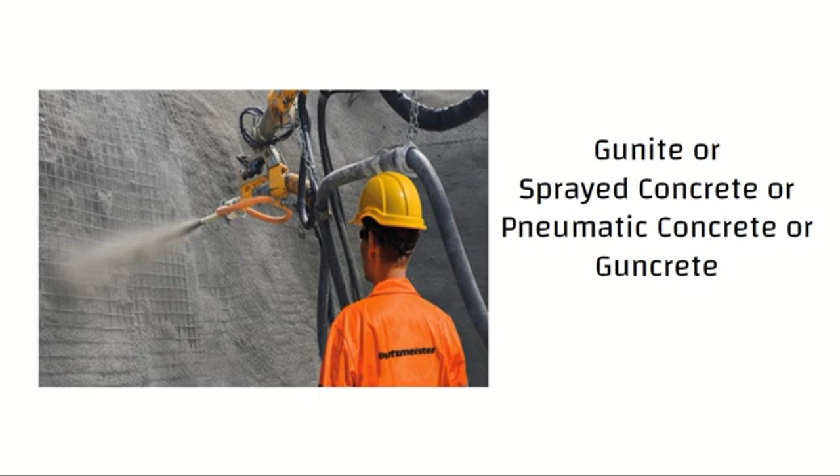Hello friends, Shotcrete, also known as gunite or sprayed concrete or pneumatic concrete or guncrete. This construction technique was first used in 1914.

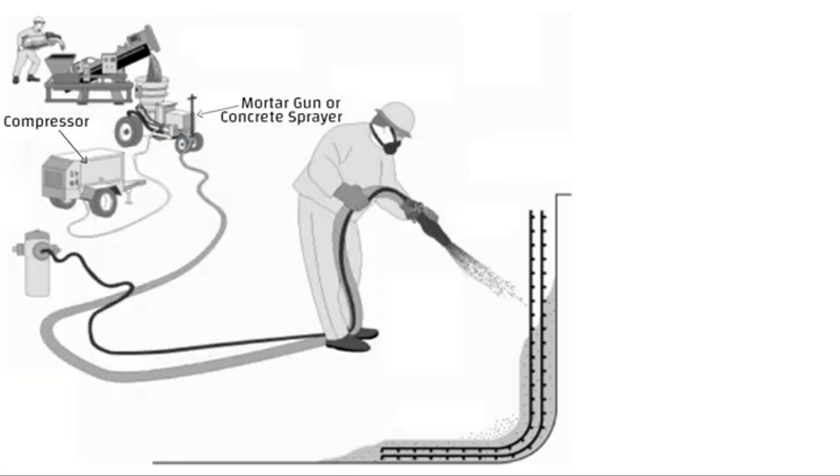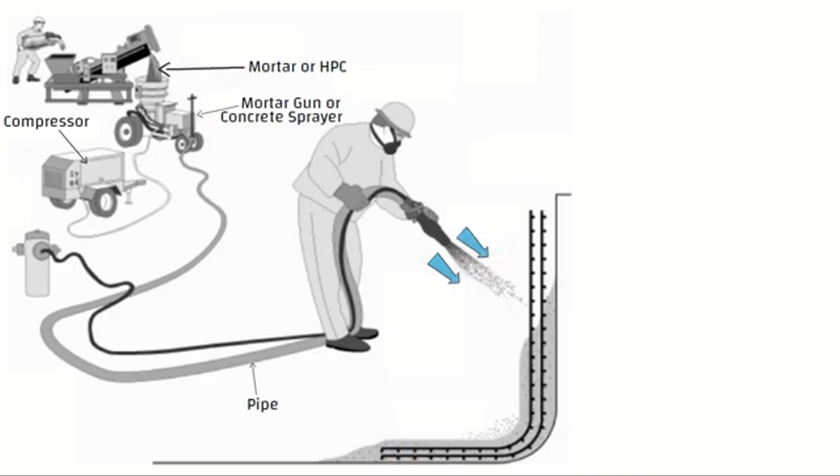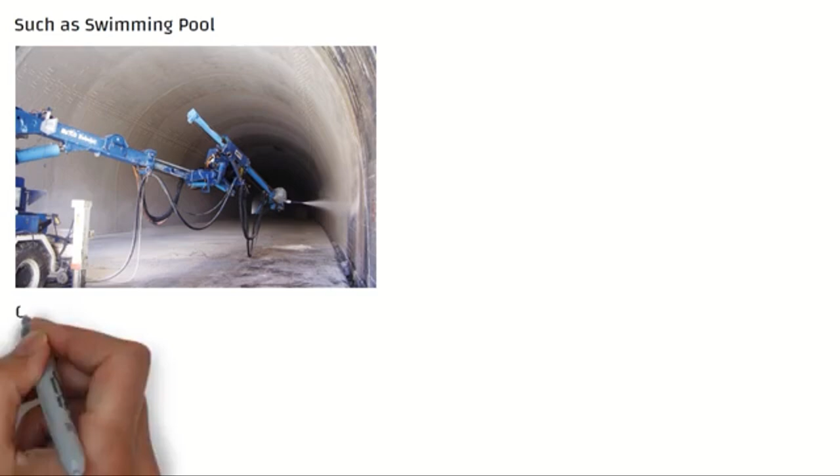Shotcreting is done with a special unit which consists of a mortar gun, also known as concrete sprayer, and a compressor. In this technique, a mortar or high performance concrete is conveyed through a pipe and pneumatically projected at high velocity onto a surface. The nozzle is controlled by hand on small jobs such as swimming pools, and on larger work it is attached to mechanical arms and operated by handheld remote control.

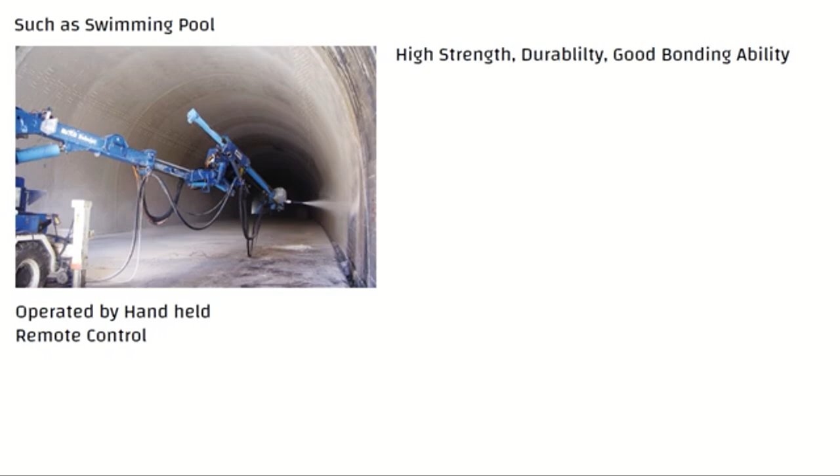It has a high strength, durability, good bonding ability, and it can be used in areas of difficult access. It can be easily sprayed onto a surface at high velocity, making it handy for operation.

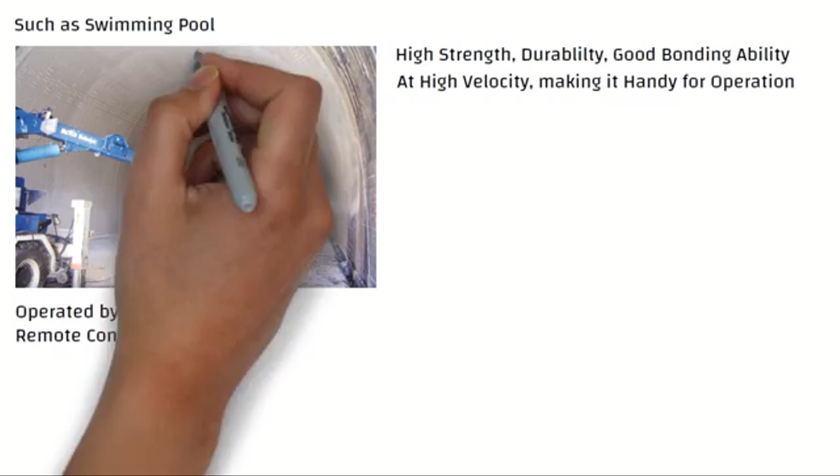Now let us understand how shotcrete is different from conventional concrete. Conventional concrete is first placed and then compacted, whereas shotcrete undergoes placement and compaction at the same time. The impact created by the application consolidates the concrete.

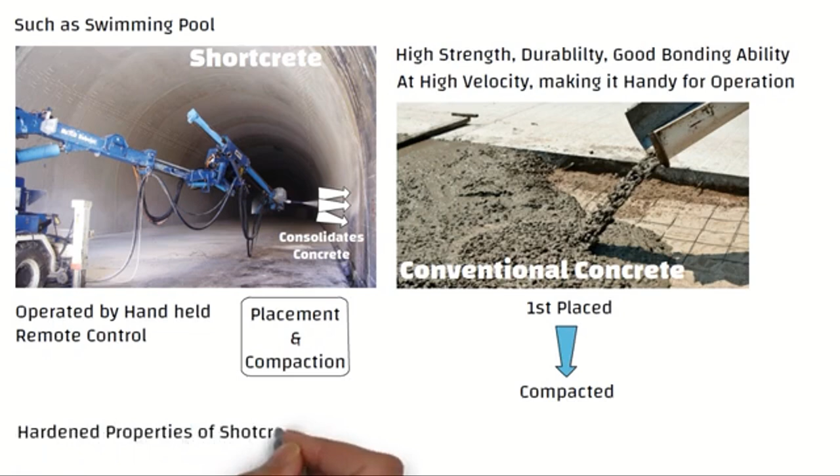Although the hardened properties of shotcrete are similar to those of conventional concrete, the nature of the placement process results in an excellent bond and instant capabilities, particularly on complex forms or shapes. The shotcrete process requires less formwork and can be more economical than conventionally placed concrete.

Poured concrete can have a compressive strength of 2500 to 3000 psi, whereas shotcrete exceeds 4000 psi. When concrete is sprayed on a surface, it causes compaction of the shotcrete paste, which results in good adhesion to the surface.

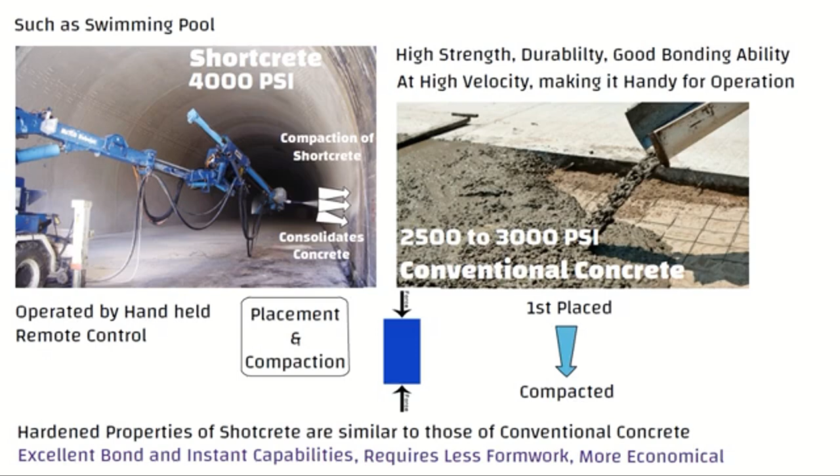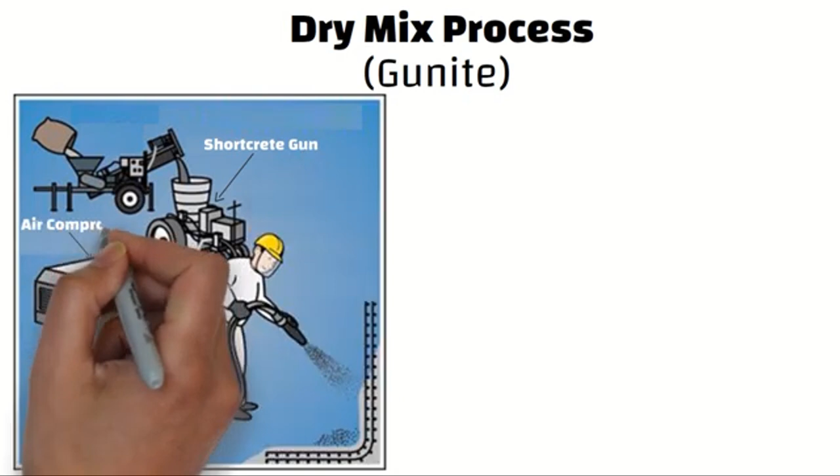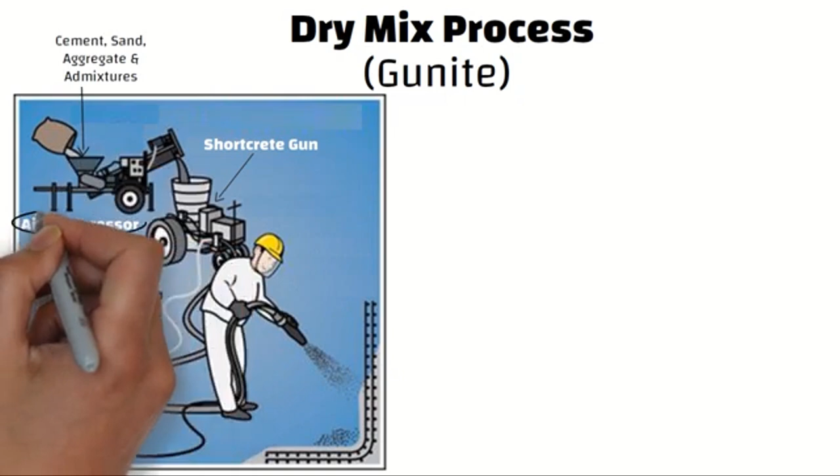Dry ingredients like cement, sand, aggregate, and admixtures are placed into a hopper and blown through a pipe using compressed air to a nozzle. The water is injected at the nozzle by a nozzleman to hydrate the mixture immediately before it is discharged onto the receiving surface.

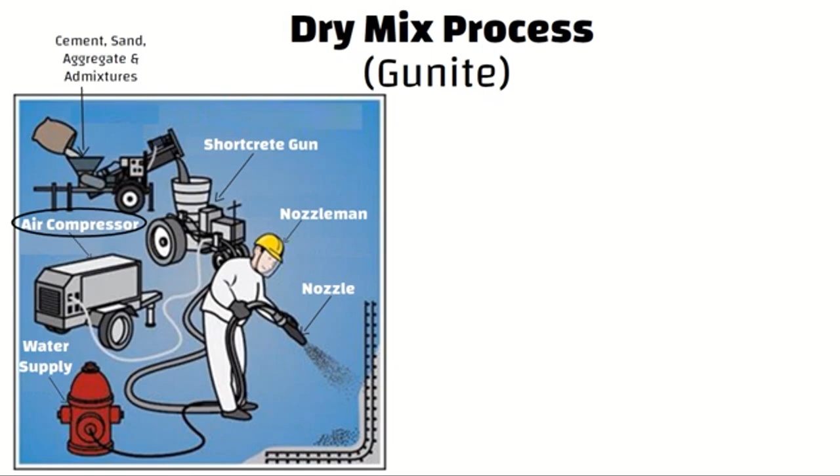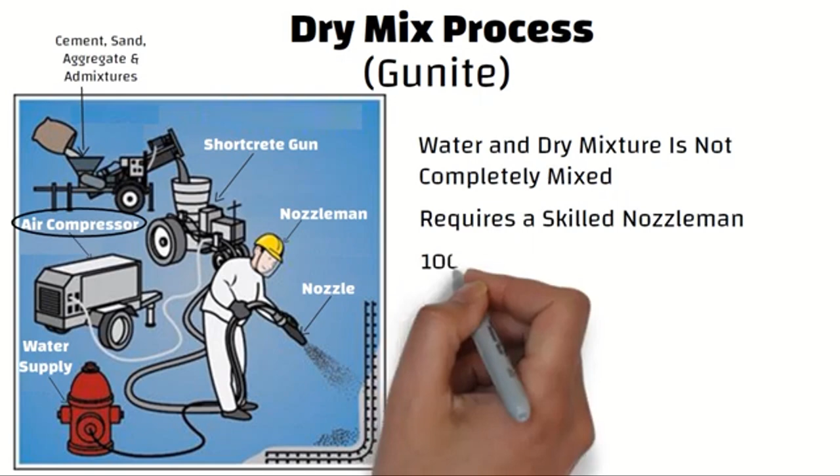The water and the dry mixture are not completely mixed, but this is completed as the mixture hits the receiving surface by high impact. This requires a skilled nozzleman, especially in case of thick or heavily reinforced sections. A nozzleman can operate from 1000 feet horizontally or 500 feet vertically from the gun.

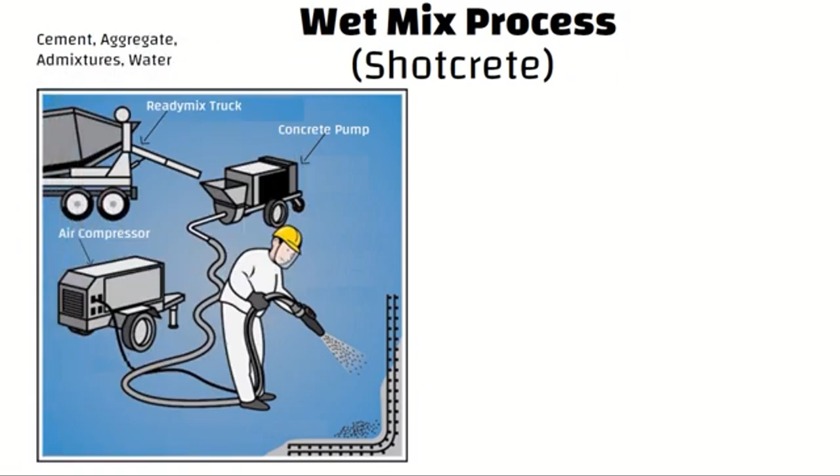Wet mix process. You can see in this picture, the ready mix truck is located here. This is the concrete pump and this is the air compressor. The cementitious material, aggregate, admixtures, including water, are thoroughly mixed by the ready mix truck and poured into a concrete pump.

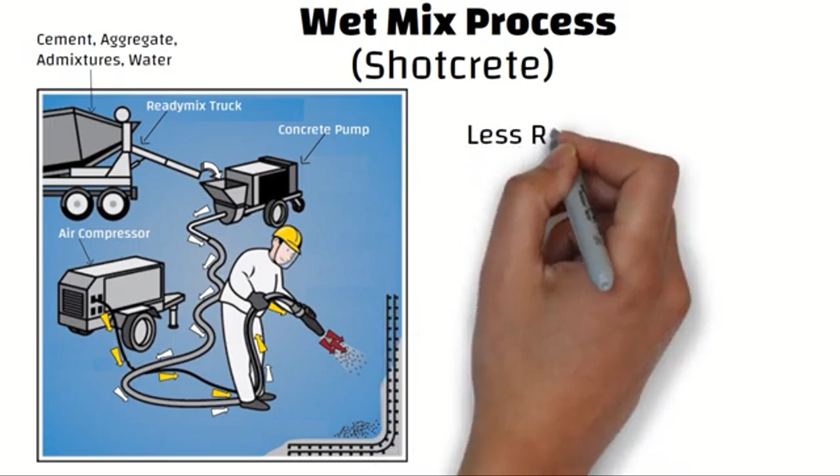Wet material is pumped to the nozzle where compressed air is introduced to increase the nozzle discharge velocity, and the mixture is thrown onto a receiving surface. The wet mix process generally produces less rebound, less waste when material falls to the floor, and less dust compared to the dry mix process.

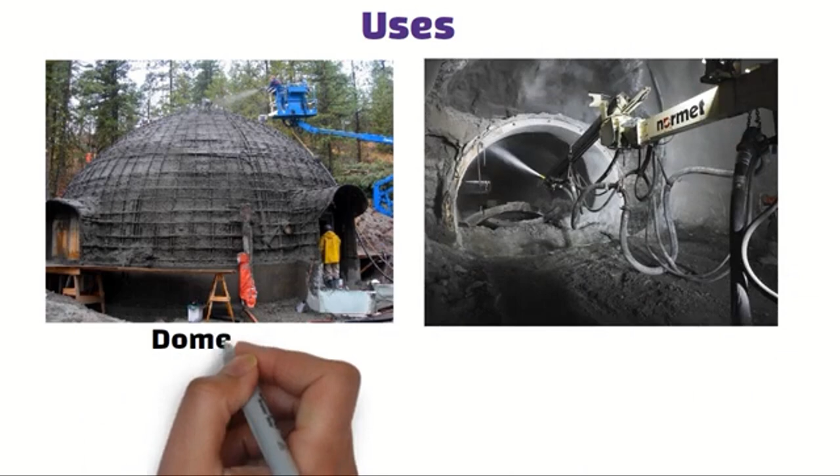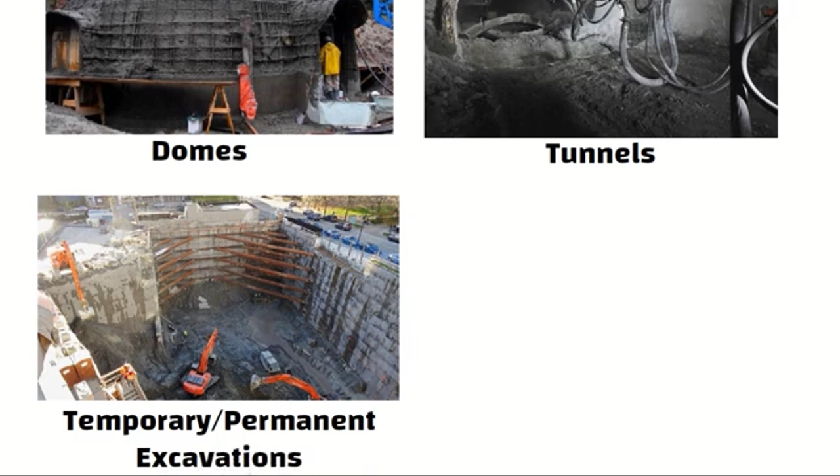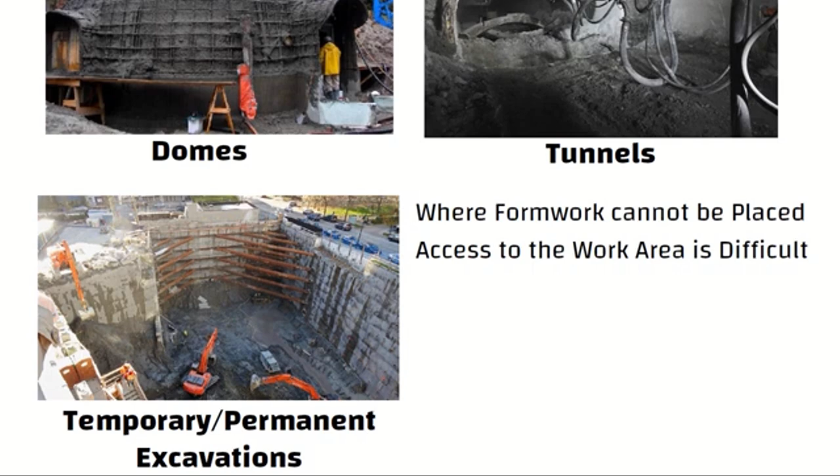Uses: Shotcreting has proved to be the best method for construction of curved surfaces like domes, tunnels, etc. Shotcrete is used to reinforce both temporary and permanent excavations. Shotcrete is advantageous in situations where formwork cannot be placed and where access to the work area is difficult, and where thin layers or variable thickness are required or normal casting techniques cannot be employed.

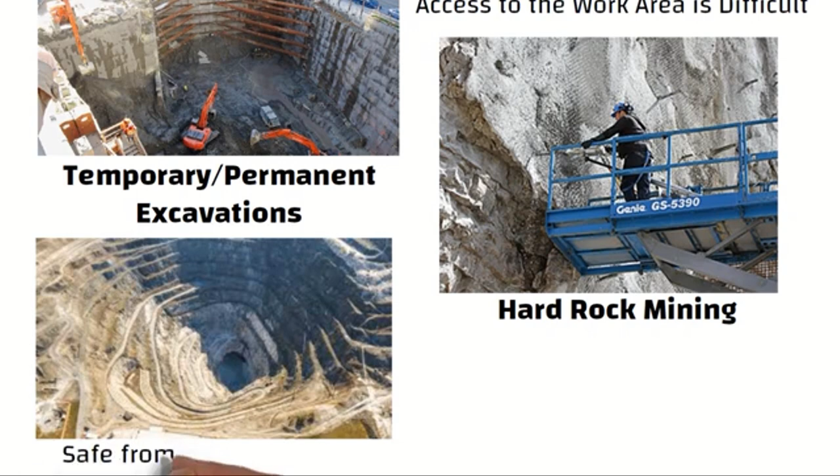Shotcrete is very useful in hard rock mining. Development of a decline pathway to go underground is critical for movement of heavy machinery, miners, and material. Shotcrete helps make these paths safe from any ground fall.

Shotcrete has been used extensively to construct concrete swimming pools. Swimming pools constructed with shotcrete are typically more durable and long-lasting than poured concrete. Additionally, the use of shotcrete allows for customization in shape, depth, and styles that are not typically available in traditional pool kits.

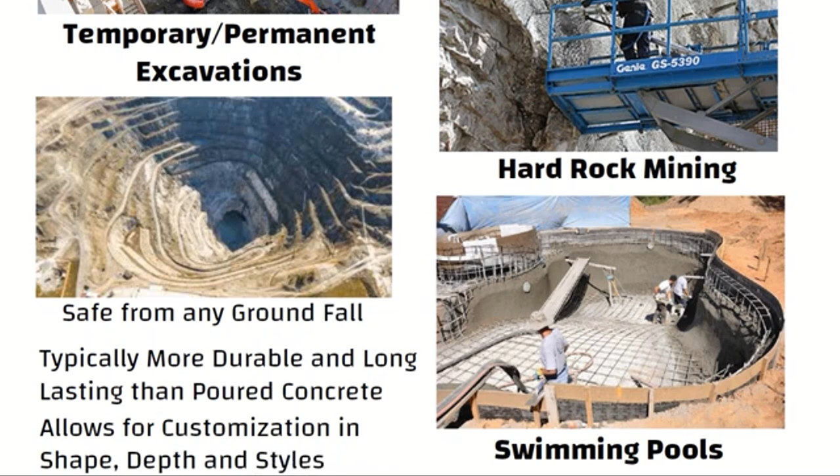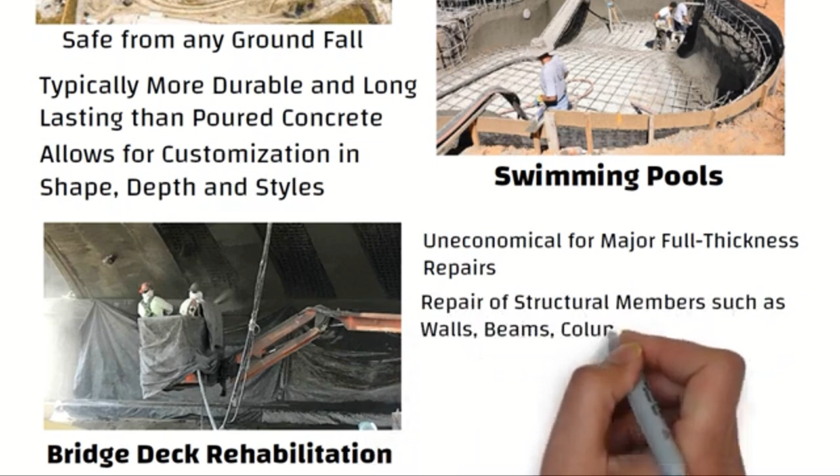Shotcrete repair can be used for bridge deck rehabilitation, but it has generally been uneconomical for major full thickness repairs. The repair of structural members such as walls, beams, columns, and connections is common for structures damaged by earthquake and fire. Marine structures.

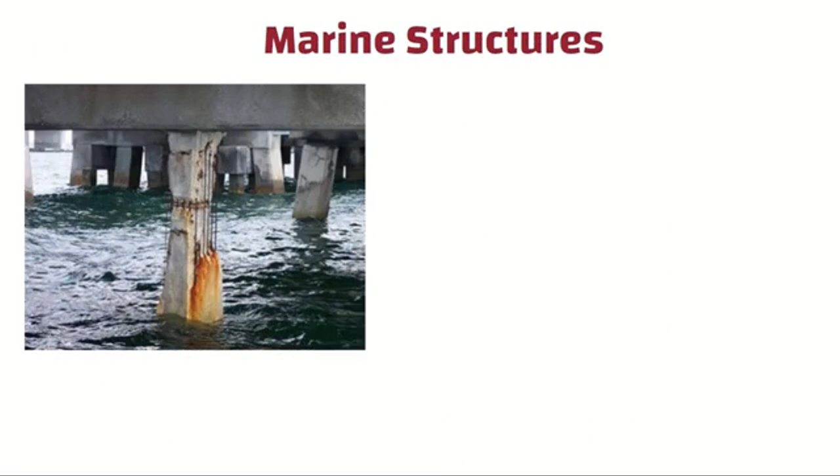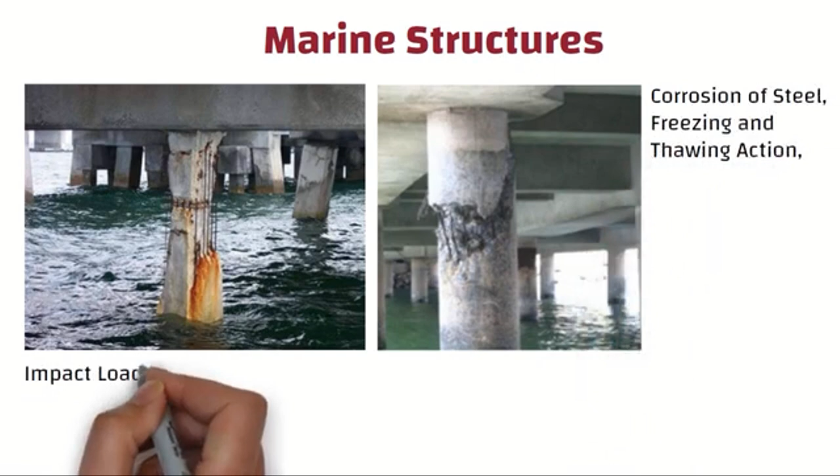Damage to marine structures can result from deterioration of concrete and reinforcement. Damaging conditions are corrosion of steel, freezing and thawing action, impact loading, structural distress, physical abrasion from the action of waves, sand, gravel, and floating ice, and chemical attack due to sulfates.

These problems can occur in most marine structures such as bridge decks, piles, pile caps, beams, piers, navigation locks, guide walls, dams, powerhouses, and discharge tunnels.

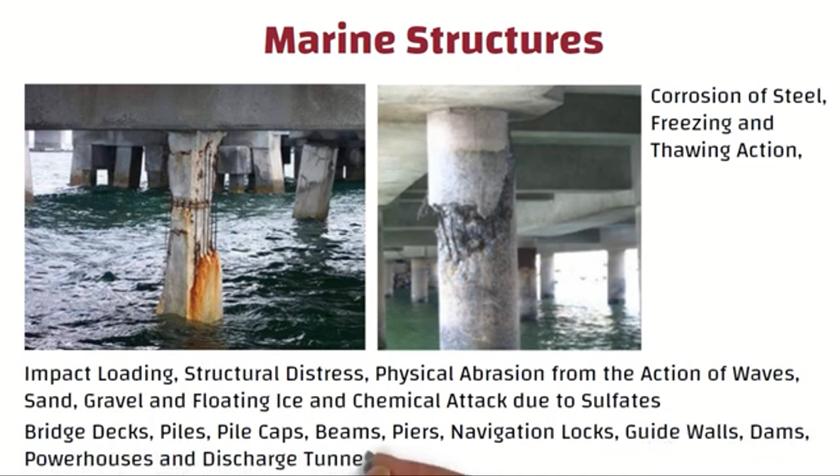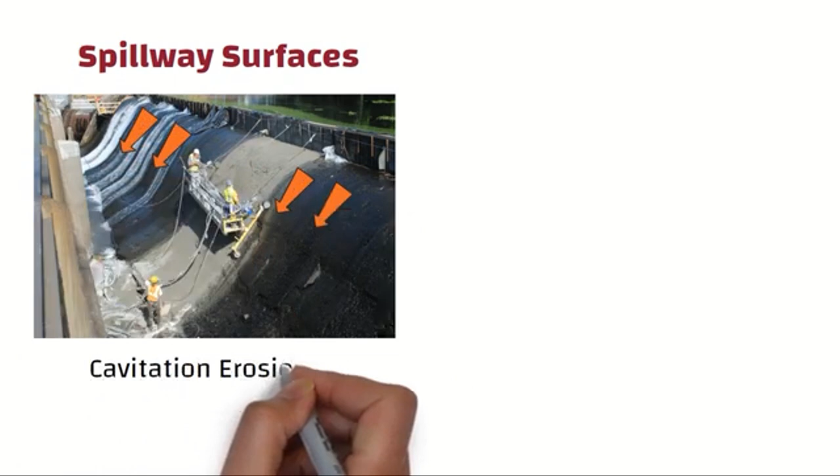Spillway surfaces: surfaces subject to high velocity flows may be damaged by cavitation erosion or abrasion erosion. Slope and surface protection: shotcrete is often used for temporary protection of exposed rock surfaces that will deteriorate when exposed to air.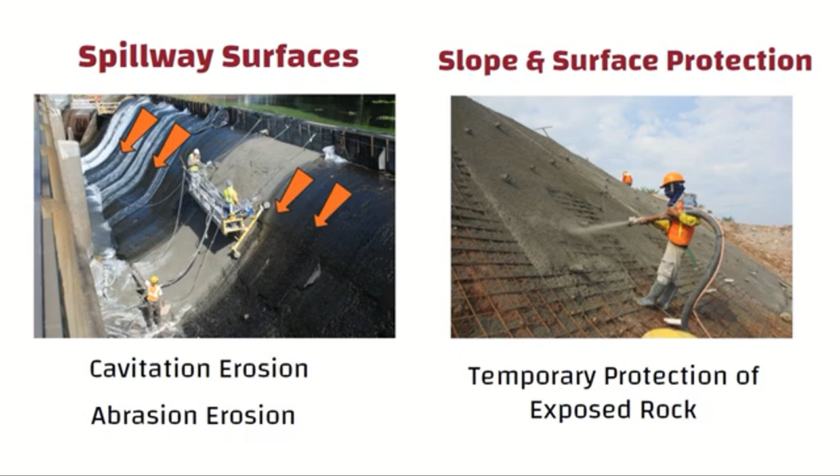Shotcrete can be of four types: fiber reinforced shotcrete, silica fume shotcrete, accelerated shotcrete, and polymer modified shotcrete. Let us discuss fiber reinforced shotcrete first.

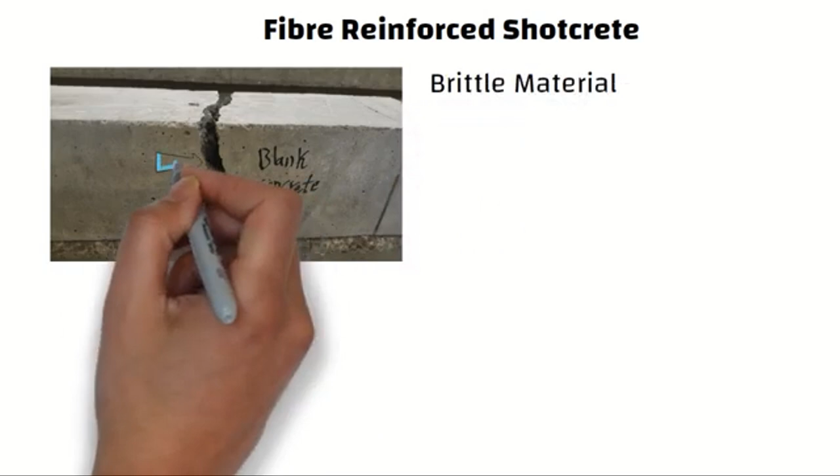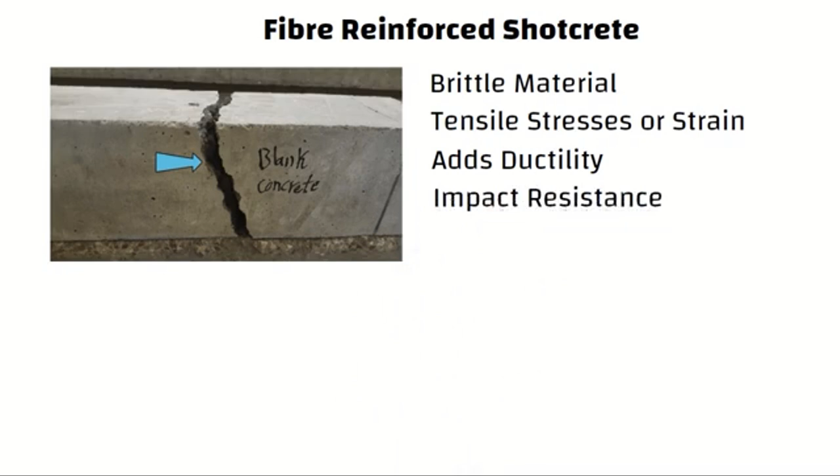Unreinforced shotcrete, like unreinforced conventional concrete, is a brittle material that experiences cracking and displacement when subjected to tensile stresses or strains. The addition of fibers to the shotcrete mixture adds ductility to the material as well as energy absorption capacity and impact resistance. Fibers used in shotcrete are available in three general forms: steel fibers, glass fibers, and synthetic fibers.

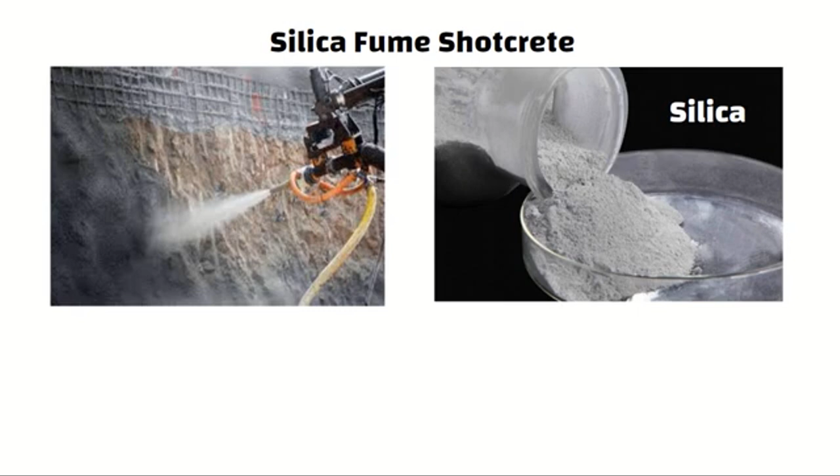Silica fume shotcrete. Silica fume is a very fine non-crystalline pozzolanic material composed mostly of silica. Silica fume is used in shotcrete to increase bond strength, decrease permeability, enhance cohesion and adhesion.

Addition of silica fume in shotcrete helps to apply thicker layers of shotcrete in a single pass to vertical and overhead surfaces. Shotcrete containing silica fume may have improved resistance to aggressive chemicals.

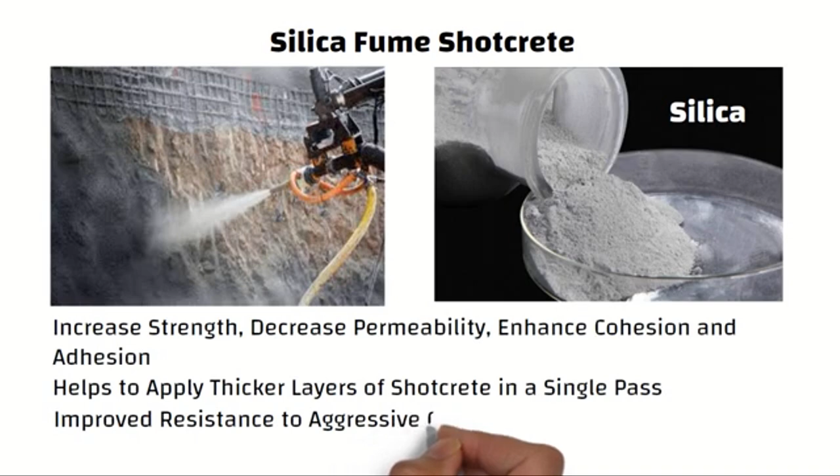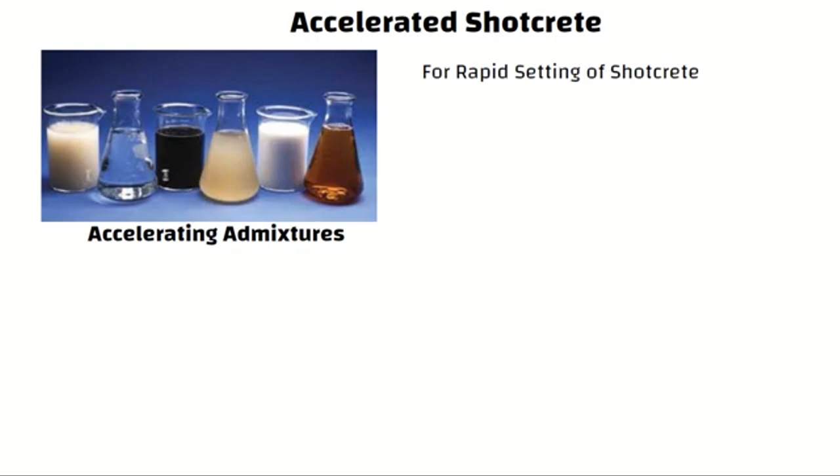Accelerated shotcrete. Accelerating admixtures are used extensively in shotcrete. Highly effective accelerators have been developed for rapid setting of shotcrete, often considered super accelerators. These are commonly used with dry mix shotcrete.

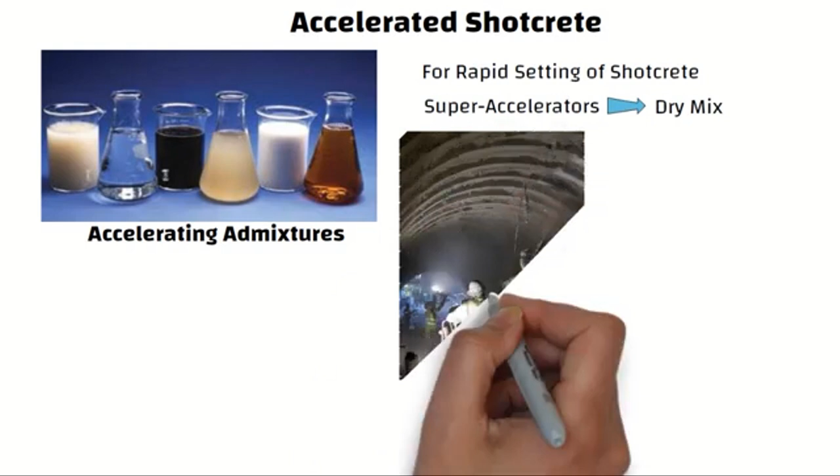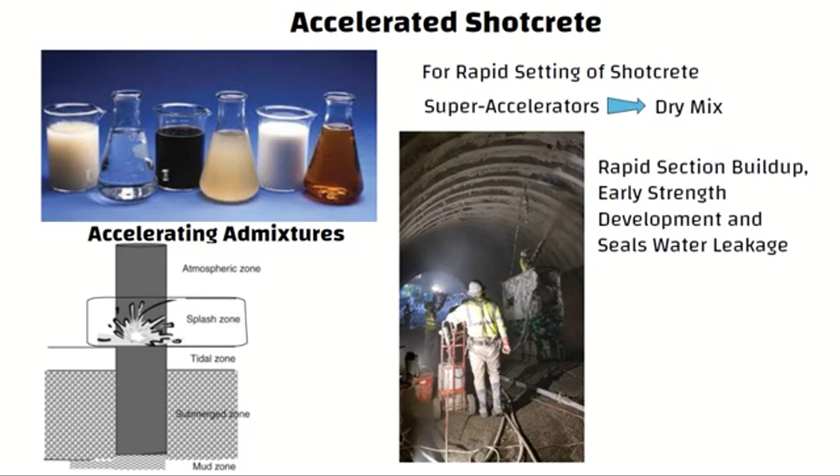Accelerated shotcrete is particularly beneficial in tunnel support because it allows rapid section buildup, early strength development, and seals water leakage. For applications in the splash zone of marine structures, an accelerating admixture may be used to prevent freshly placed shotcrete from being washed away by the incoming tide or by wave action.

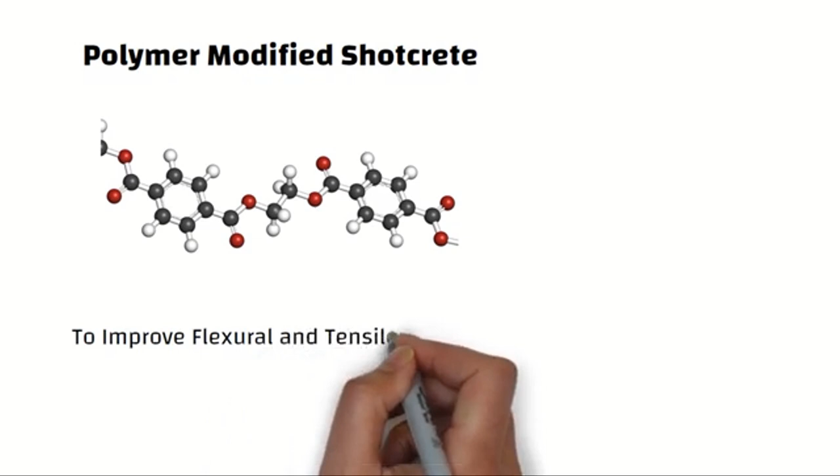Polymer modified shotcrete. Polymers are incorporated into shotcrete to improve flexural and tensile strengths, improve bond, and reduce absorption because of lower permeabilities.